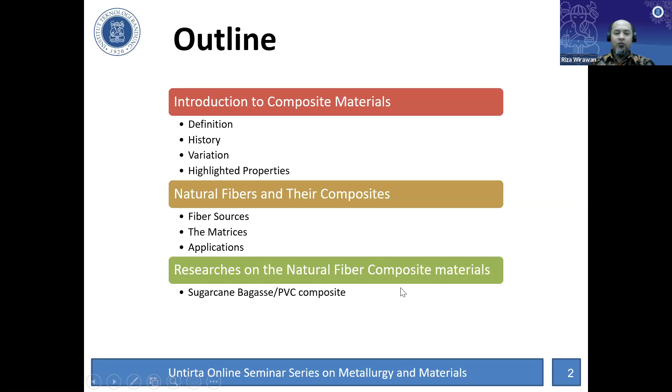So what I will share about this afternoon is I will discuss about the fiber sources, the matrix, and the applications. And also at the last of the presentation, I will present my latest research on natural fiber composite materials, which is the sugarcane bagasse and polyvinyl chloride, or PVC, composites.

So let's start with the definitions. As per definitions, the composite materials can be defined as a combination of 2 or more materials that result in better properties than those of the individual components used alone. When we talk about the combination of 2 or more materials, we also have some alloys. Some metal alloys are also a combination of 2 or more materials. But in composites, it is specific in that the properties of each material will retain its separate chemical, physical, and mechanical properties.

So different from alloys, when you add some carbon to iron, for example, the carbon will dissolve in the iron. So they will form some solution, like ferrite or pearlite, or maybe anything else. But for the composite, we will see each of the materials as it is.

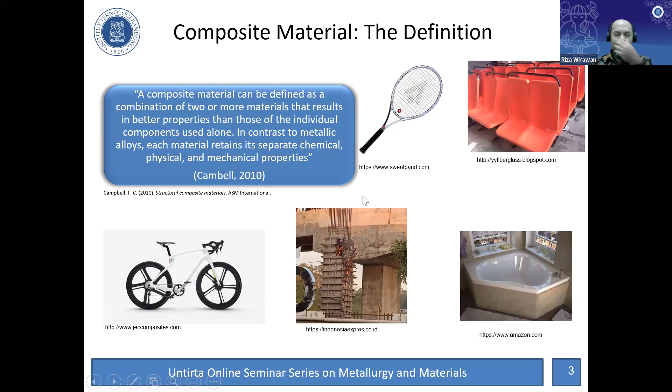So let's talk about the history of the composites. Actually, 3,400 before centuries, we can see some old buildings made from straw and mud bricks. It is actually composites because you can still see the straw inside, and also the mud. It is a composite from natural fiber. So from this information, we can see that from before centuries, people have used composites, but of course in the traditional way.

And later on, at 1,200 after centuries, BC before Christ, we have the composite bows from the Mongolians. They made composites from wood and bone, something like that, and also from natural resin, pine resin. So two of them are actually composites, but at that day, they just used the composite without knowing the theory inside, but because of their experience, they could make stuff from composites.

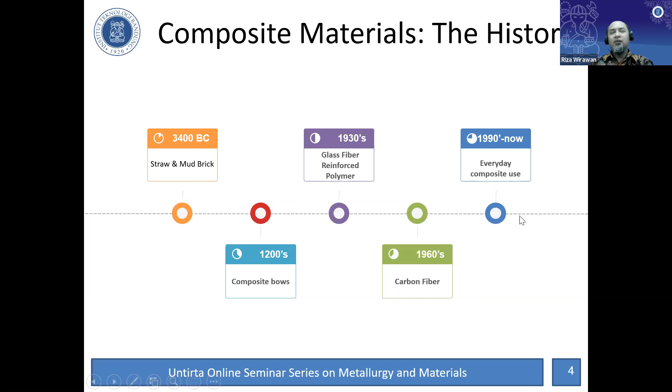It is actually more developed in every year. So many types of composites we can have now.

Okay, so as per definition, it is actually the combination of two or many materials. The composites have two materials inside. One acts as the matrix. The other one will act as the filler or reinforcement. So the matrix will glue the reinforcement to make the composite.

So the reinforcement we have now, they are available in the form of fiber, particulate, and flakes. And also for the matrix, you can use the polymer, you can use the metal, and you can use the ceramic as the matrix, as long as they can bind together the filler, we can call it the matrix. So the Portland cement is the ceramic that we can use as concrete.

And there are also developments in metal matrix composites, but the most usable composite, the most known composite in this era, is actually the fiber and polymer composites. The other composites also have some developments, but the speed of the development is not as high as the polymer and fiber composites.

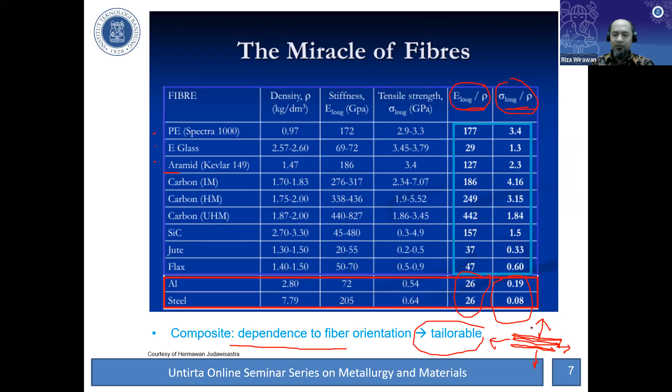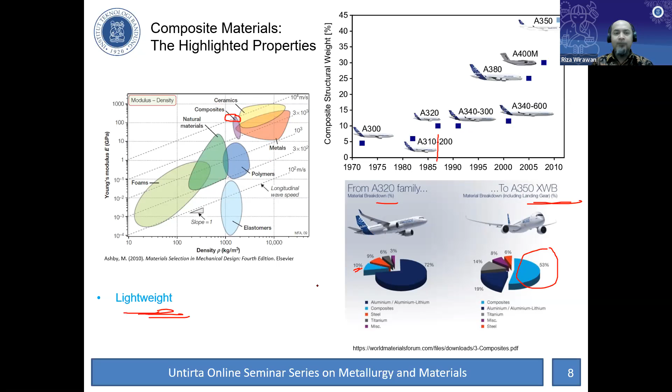So next, for the next development, beside the properties of the materials—high tensile stress, high tensile strength, high modulus, etc.—some environmental issues also make some researchers develop other sources of the fiber.

So now on we have the glass fiber, carbon fiber, all of them from synthetic material, and they are used for high quality applications. You see that the price of the stuff from synthetic materials is very high, very expensive. So now some of the researchers start to have some research in natural fiber.

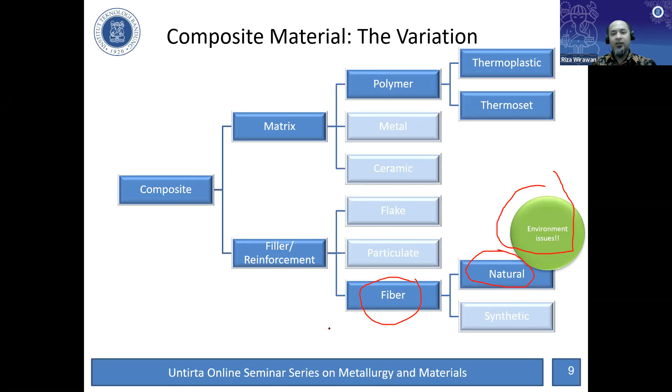These are the fiber sources you can get from some animals, and you can also get some fibers from minerals. Long time ago, many of our houses had asbestos at the top. However, because of some environmental and health issues, it has actually now been banned in many countries, because it's a very small particle. When you breathe, these materials can get into your lungs, so it will be dangerous for your health.

And now the focus of our discussion is actually the natural fiber from the plants, because of some environmental issues.

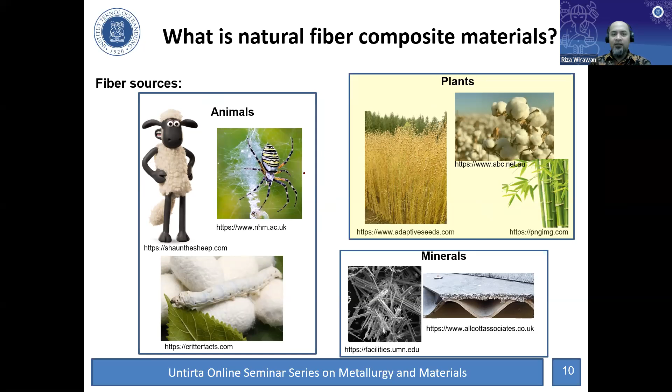So these are some examples of fiber from plants: cotton, and this is flax fiber, the most famous one for natural fiber composites, and bamboo. You can also use fiber from bamboo as a natural fiber for composite materials.

Actually, from plant fiber you can have wood, but of course we don't usually use wood for composites this way. We use some cheap wood, or maybe powder, that you usually throw away. After you saw the wood, you get the fiber, and then you can press the fiber and get new materials. You can also get fiber from the stem or bast - examples are flax, jute, kenaf, and ramie.

Also from Indonesia, we have so many ramie fibers. And also from leaves, you can obtain fiber from pineapple, banana, abaca, sisal, and also coconut - the seed or fruit of the coconut. You can also get it from palm oil, and also from grass-type plants, just like bamboo and reeds, etc.

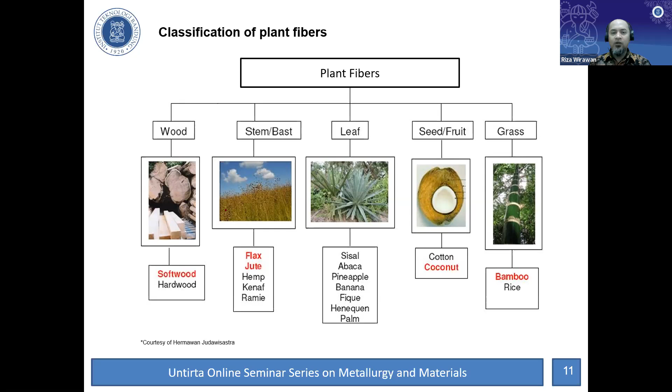So there are many types of plant fibers that we can use for the development of composites. Of course, because Indonesia is a tropical country, we have so many varieties of these fiber sources. So the development is still widely open for these natural fiber composites.

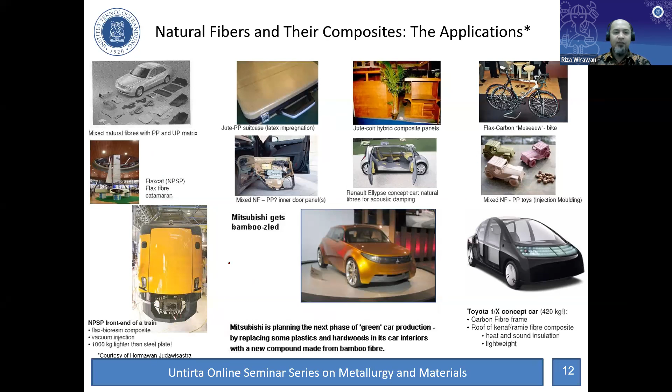And this is some application we can see nowadays. If you look at some of these cars, the interior of the cars are made of carbon fiber and composites. And also so many panels now are made of composites, instead of plywood - you can also find composites here. And some toys also you can have from this type of composite, in the front end of a train, and these are the flax fiber in the catamaran of the boat.

Okay, now let's see the comparison of properties of various fibers. Flax fiber is actually now the leading natural fiber composite in application because of the higher specific modulus among other fibers, including glass fiber. So usually natural fiber is compared with glass fiber, because the strength is actually in the middle, not as high as carbon. So there is no tendency to compete with carbon fiber for natural fiber, but we can compare it with glass fiber.

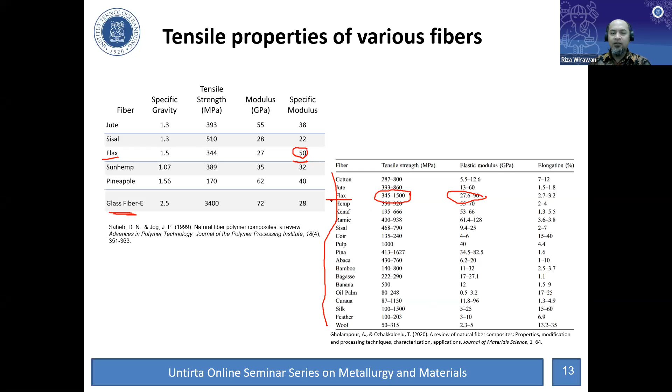This is the data we can get from 1999, and now at 2020 you can also see many people exploring fiber from many sources. But until now, we can see that flax still obtains the higher tensile strength and higher modulus. Some other fibers also try to compete with flax fiber, but still in application they are not yet able to compete with flax fiber.

Okay, and then beside the fiber, we will also have various matrix materials. So the matrix we have also in thermoplastic and thermoset - this is for the petrochemical-based or synthetic matrix. But nowadays, because of environmental issues, we also have bio-based matrix. The bio-based matrix is favorable to be mixed with natural fiber because of the same characteristic in hydrophilic properties.

Hydrophilic means they tend to absorb water. We use natural fiber, which is plant fiber, which absorbs water. So it will be better mixed with bio-based material, which also absorbs water - they can bind together. However, because of the low mechanical properties, this kind of bio-based material is still in development.

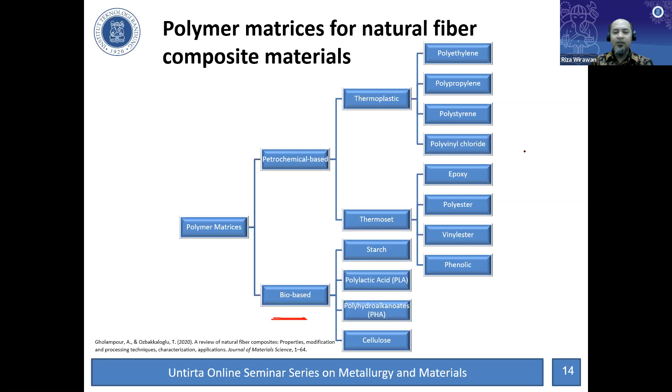So now let me present my previous research. Because of the properties of the natural fiber and the environmental issues, we try to find a new composite material which comes from sugarcane bagasse.

What is sugarcane bagasse? Sugarcane is a plant where you get sugar, and after you get the sugar juice from the sugarcane, you have the bagasse, which is actually thrown away. You don't use it, because if you use it as fuel, the energy is actually low compared to any other wood. So people try to use this bagasse to be used as other materials.

So we try to mix this sugarcane bagasse with polyvinyl chloride. Our next presentation is based on some publications, and this is just the resume of these publications. If you want to learn more about this composite, you can read these publications.

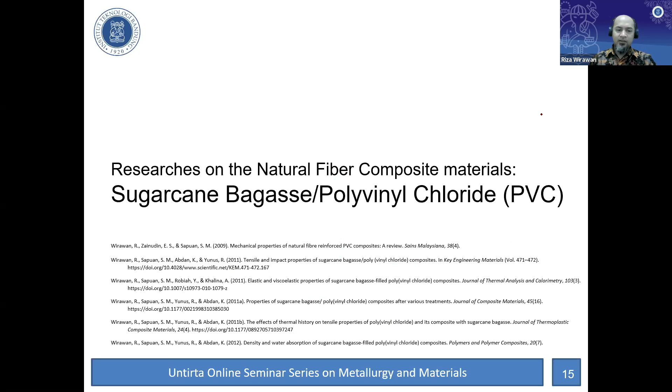From this figure, we can see that the chlorine is very big. That's why at the vinyl chloride, we have fixed around 56 to 57%. The source of these materials is actually from natrium chloride and of course hydrocarbon. But because of the higher source of the non-hydrocarbon, the price is very low.

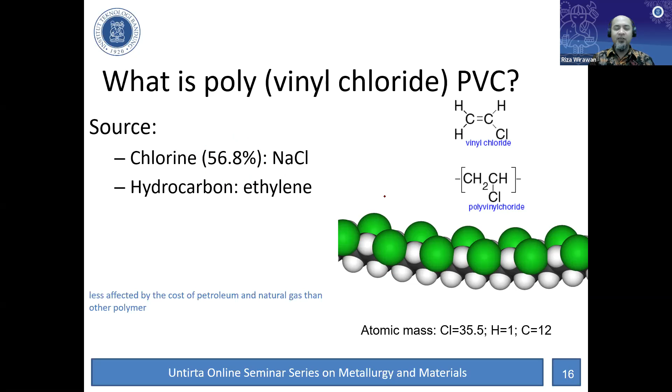This is the reason why we use PVC. It is low cost, easy to fabricate. That's why you can get some pipes in your home made of PVC. Your playground is also made of PVC, and overseas people use PVC also for fences.

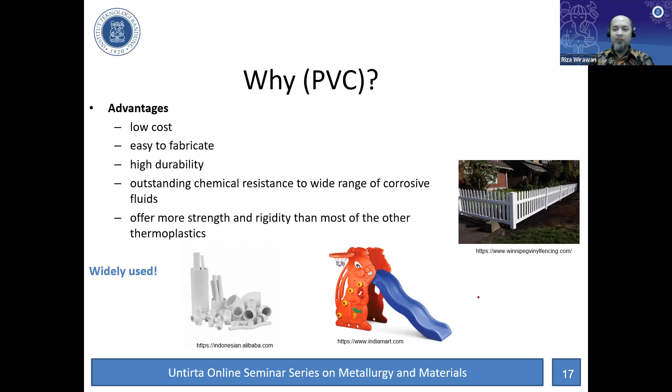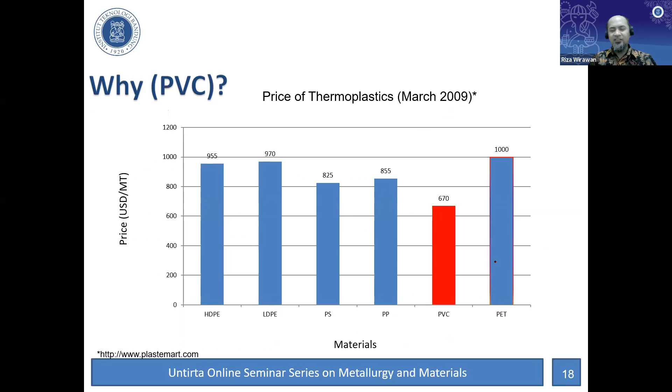This is the comparison price of PVC. It is lower than other thermoplastics. This was obtained in 2009, but as a comparison in this year, it is also not so different from this.

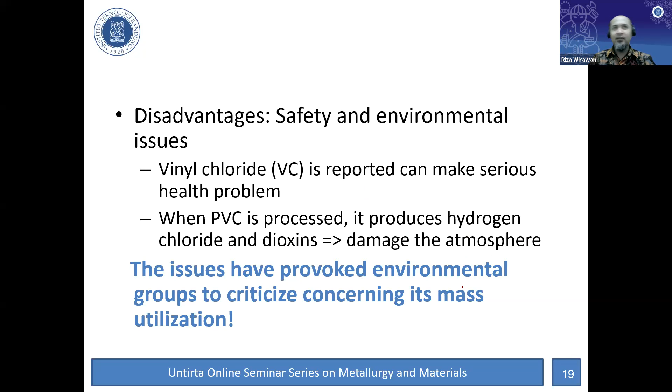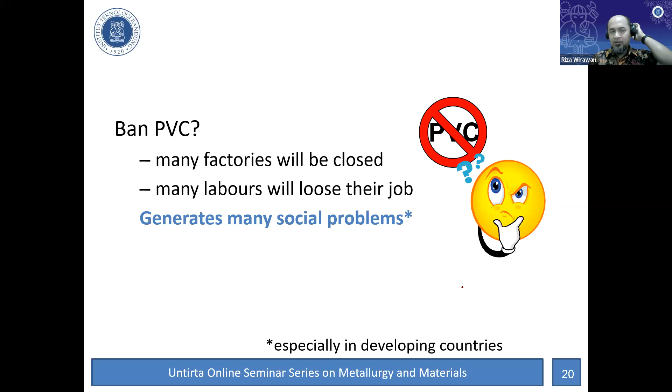We hope that the content of PVC is reduced. So this is why we use PVC - pure PVC will not be the good solution. So this is the alternative. I think I have to move a little bit fast.

This is the sugarcane you can see in the market. We have the outer part, which we call rind, and the inside part, which we call pith. What you see here is the pith - very soft material. Actually, it has cellulose, but not so high, only 35 to 40%.

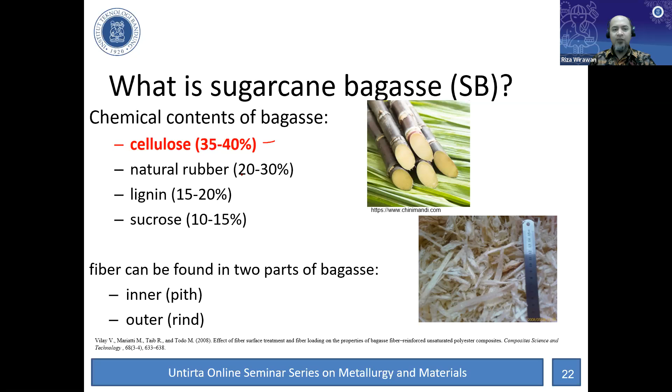Why sugarcane bagasse? Actually, because it is trash. We want to use the unused material to make some useful materials.

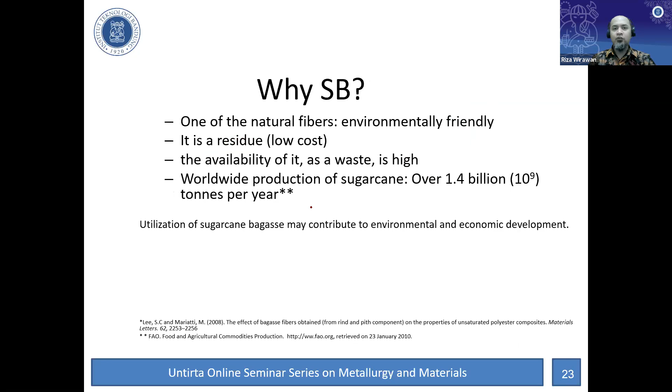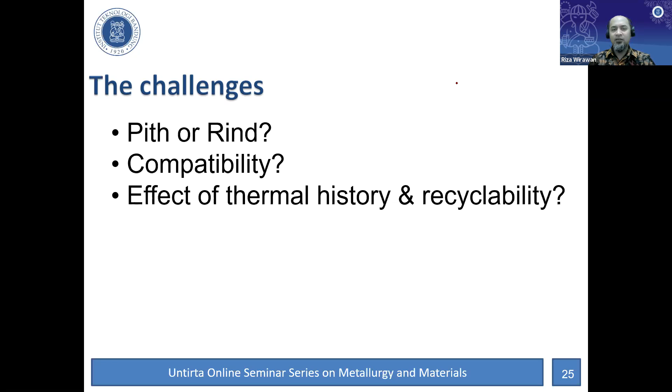I think I will not go into detail on this, but this is what we have done previously. So how can we make the composite from this fiber? First, we dry the fiber under the sunlight, and then we chop the fiber. Inside here, there are so many knives.

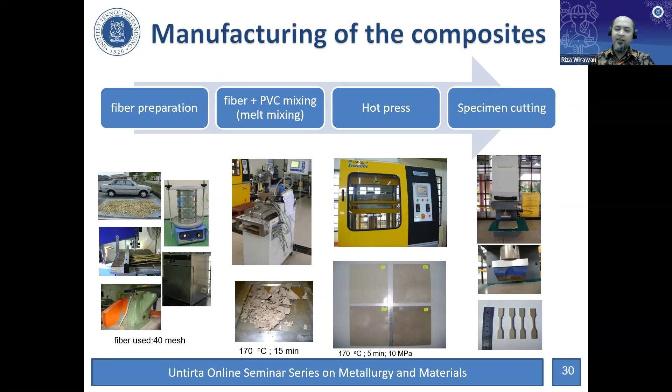And then we cut it to the standard of the ASTM for the tensile test. Before that, of course, we test the single fiber to see the potential, and we can see the Young's modulus of the rind, the outer part, is much higher than the inside part of the sugarcane bagasse. And also the tensile strength.

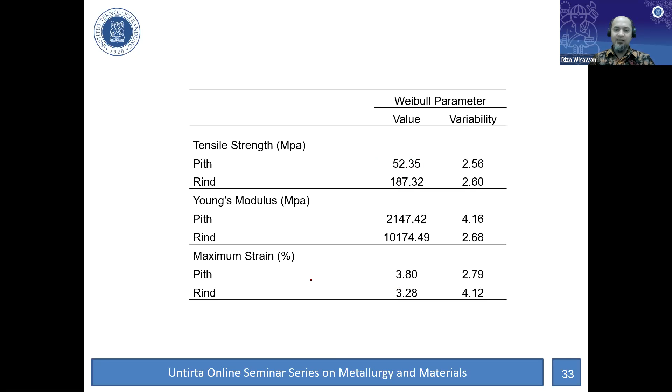But for the maximum strain, the pith, or the inside of bagasse, is a little bit higher than the rind. So what we have here is actually for the tensile strength: if you have the rind, the outer part of the sugarcane bagasse, we will have higher strength than the PVC, and higher tensile modulus than the PVC. But for the pith, it is lower than the PVC itself.

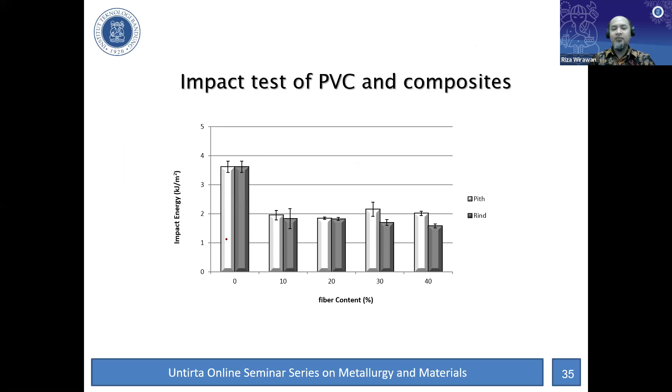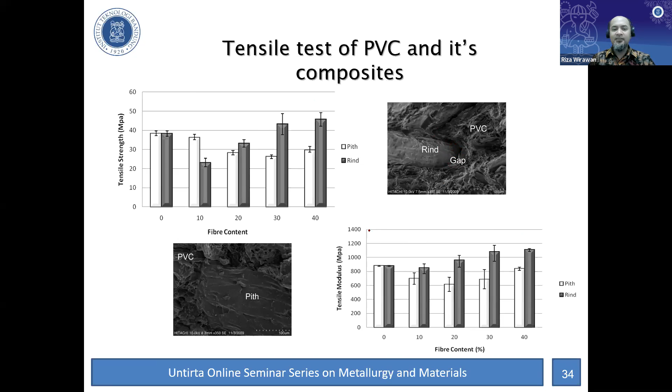But it is lower in the impact energy because of so many gaps here. You can see it is obtained from the SEM, scanning electron microscopy. There are so many gaps here, so the gaps will produce the cracks, and then we'll have some low impact energy.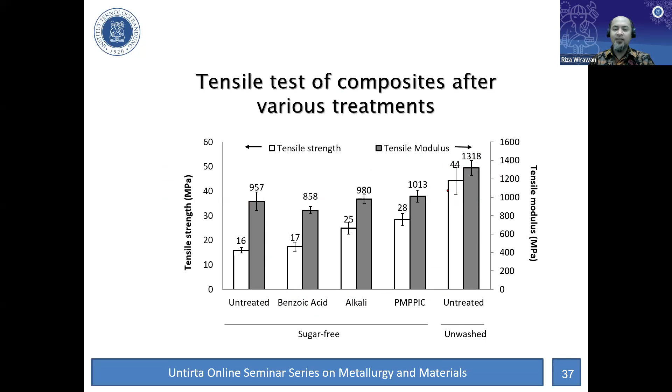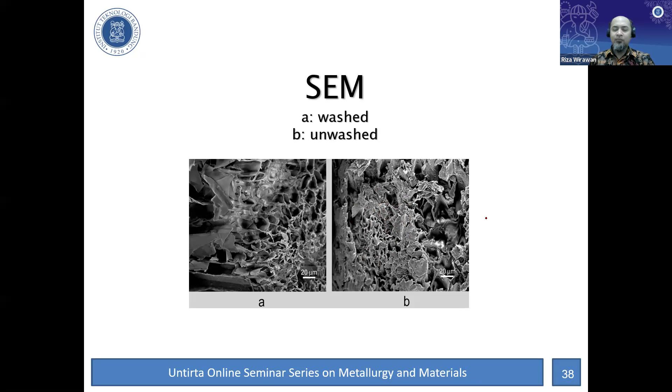So the most important one is that we try to have some treatments to this fiber to have better properties. But surprisingly, when we don't wash the sugarcane bagasse, we have higher tensile strength and higher tensile modulus. Why? Because there is sugar inside the bagasse, and the sugar is actually responsible for increasing the tensile properties of the composite. This is the surprising result from this research. You can see this is the unwashed material.

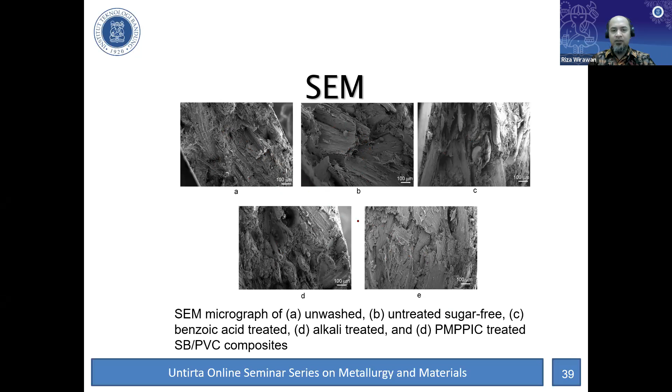It means there are many fibers here. This is the treatment with the other chemical. You can see the morphology, the structure is not so different. We can see if you use B, C, and D, there are many voids inside, but for two of these, they mix better.

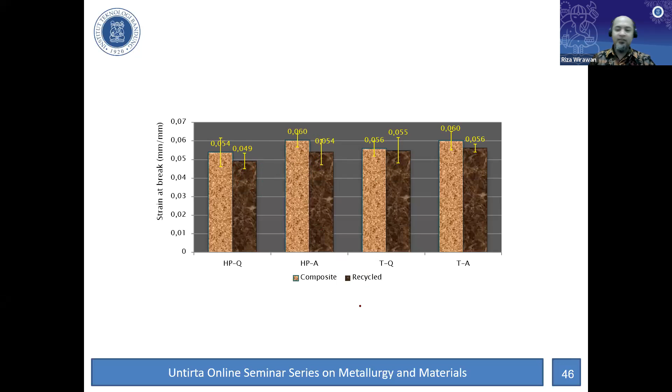I think I'll skip this one, but this is actually how we try to recycle the composite. For the conclusion, we can recycle this composite, and the tensile properties are not significantly changed after the recycling of the composite. Okay, I think that's all because of the time.

And now the conclusions: we have the best tensile properties at 40% of the rind and PVC. We also tested the thermal stability, and it offers higher thermal stability. This is the surprising result: it is the best treatment, yet it's not a treatment, because you have the sugar inside, and the sugar helps you have better tensile properties of the composites.

And then if you have thermal history, you can remove the thermal history by reheating the composite, just like when you have thermal treatment or heat treatment of steels. Just like steels, you will have heat treatment also for this composite. Okay, thank you very much.

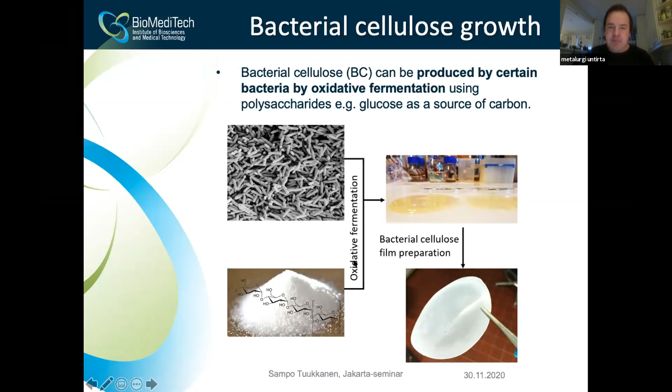So then I'll go more into details on this film fabrication, about these wood-based materials - how this CNF, cellulose nanofibril material, was obtained.

We have used a mechanical homogenizing process, basically 6 passes with this microfibrillator equipment, starting from bleached birch cellulose mass, which is conventionally used to make paper. In this case we use the microfibrillator to make it smaller, to separate the fibrils from each other. There's a reference here for the paper describing the technology.

After this, when we got the nanocellulose out from this mass, we used pressure filtering to dry the mass to the film, remove the water, and then we use the hot press to compress to make the film kind of stiffer.

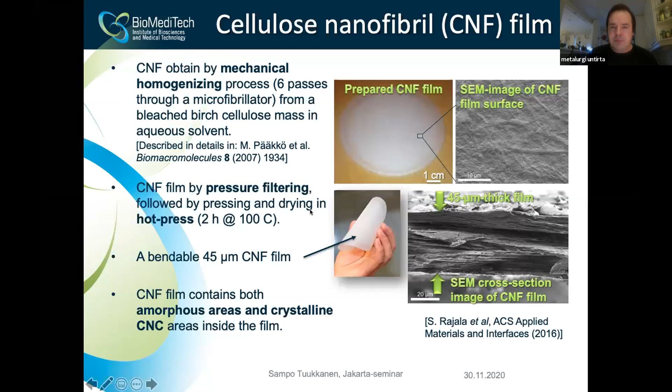Then the other case with the bacterial cellulose. We have studied the natural bacterial strain, called wild type bacterial strain, but we have also studied 3 different engineered strains where they have modified the genome of the bacteria. The aim here was to enhance the production of the cellulose by modifying the strain genome.

And these are called here PA, PAB, PABCD. I'm not expert with this because I'm a physicist, and this was done in collaboration with the chemist who was actually doing this engineering. So you can see more about this engineering from this paper. Below left you can see the reference of that.

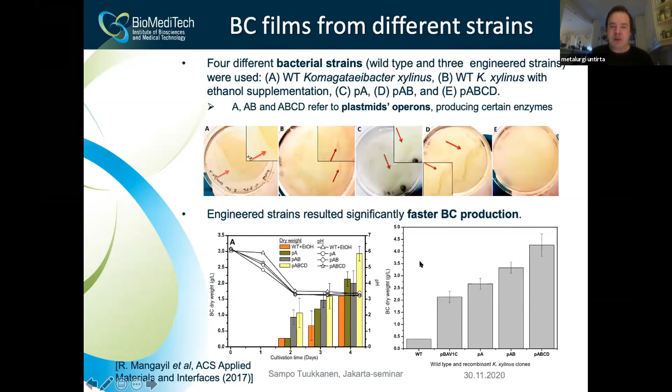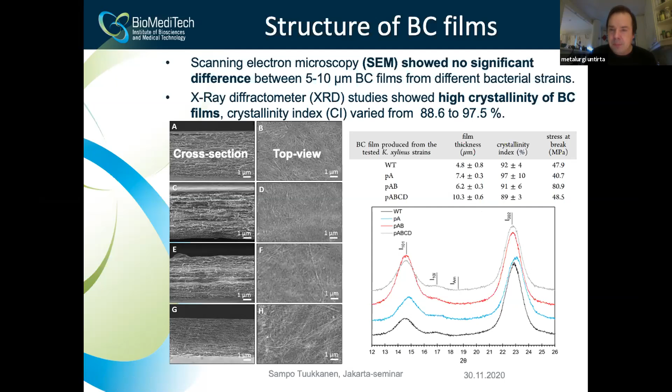And okay, then we go to the piezoelectricity. So a piezoelectric effect means that when you apply a mechanical force to some material, it creates an electrical charge separation. So you can create electricity from mechanical force, basically, or mechanical signal exposure, I mean. And based on the theory...

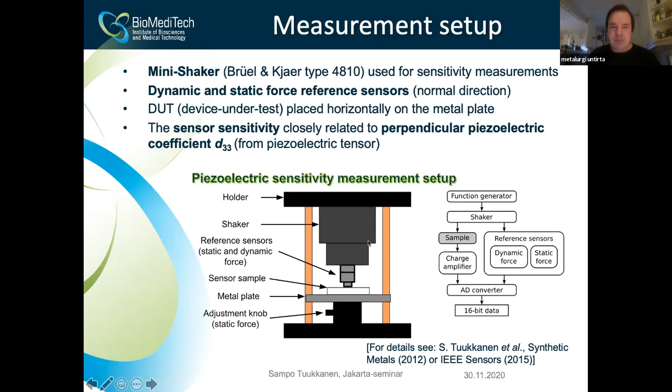We applied first a static force - we used 3 Newtons static force, which keeps the sample in place so it doesn't move around. Then after this, we apply a sinusoidal dynamic force, which has to be less than the static force, because otherwise we would detach the sample from the stage. So basically we are just changing the pressure we apply on the sensor, but it still maintains its position.

We also have to do statistics to have better reliability in the test. We've done 3 to 9 repeats, and we've also turned the sensor upside down to see if there are differences between the sides. Theoretically there shouldn't be, but there are, because it's not perfect - the system is not perfect.

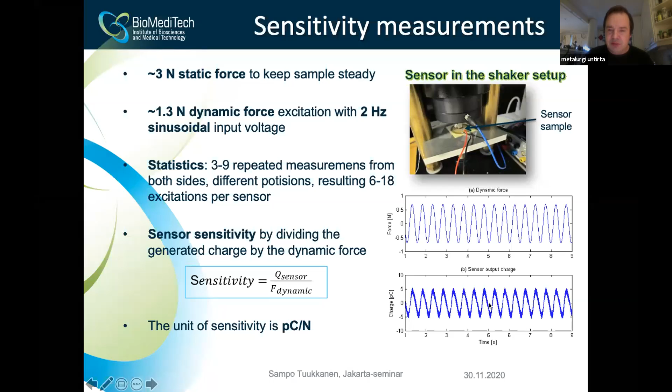Basically what we get out is the sensor sensitivity, which is the amount of charge we get out divided by the force we apply. This gives the sensitivity, and the unit is coulombs per Newton. In this case, we talk about picocoulombs per Newton, because that's the generally used unit - it's the scale you get in normal piezo materials, that's why there's the 'pico' prefix. Here on the bottom right you can see the sinusoidal input force signal and the measured output charge from that.